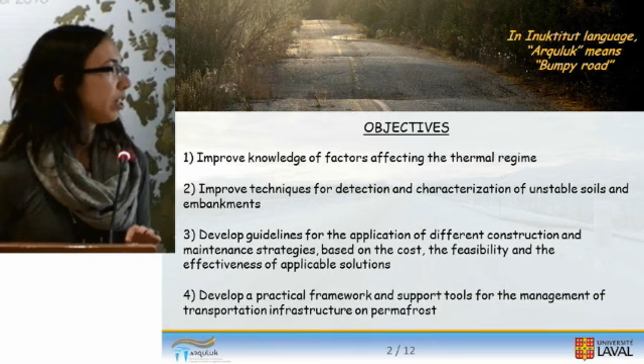And also within the ARQULUK program, we want to develop guidelines for the application of different construction and maintenance strategies based on the cost, the feasibility, and the effectiveness of applicable solutions. And finally, we would like to develop a practical framework and engineering tools to support the design and the management of transportation infrastructures on permafrost.

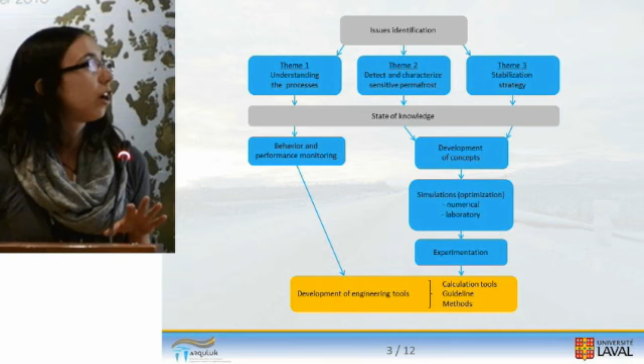The program has been divided in 3 different themes, which are understanding the processes, detect and characterize sensitive permafrost, and stabilization strategy. These themes are divided in a way that will help the involvement of graduate students through master's and PhD projects. And all of these projects will start with the state of knowledge and end with the development of engineering tools, such as calculation tools, guidelines, and methods.

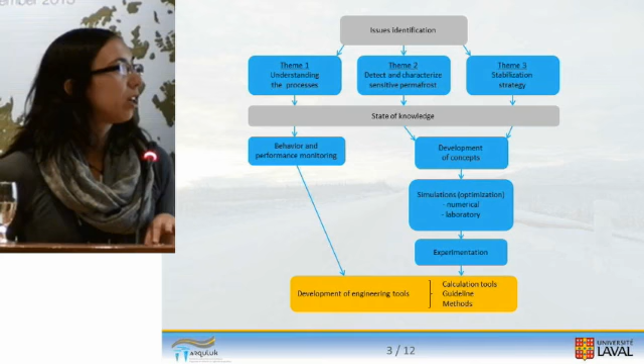But to do so, there's two different paths that we can follow depending on the theme that we are in. So all the projects in Theme 1 will be characterized by behavior and performance monitoring, and all the projects in Themes 2 and 3 will follow the path that is characterized by the development of concepts, laboratory and numerical simulation, as well as experimentation. The ARQULUK program started in April 2012, and it will be an ongoing 5-year program that will end in 2017.

So I'm going to talk more about all the projects a little bit later in my presentation, but this is the timetable. I just want to show you the progression of all the projects so far. So the red line represents where we are right now. So in Theme 1, which is the improvement of knowledge, we have one master project on experimental test site monitoring that will be in Beaver Creek and Tasiujaq, and it will start in January 2014. We have an ongoing PhD project that just started.

In Theme 2, which is the identification and characterization of permafrost, we have an ongoing project on geophysical and thermal methods. There's a master project that will also start at the beginning of the summer about profile analysis. We have an ongoing master project on oedometric testing. And we have now a new project about the mechanical behavior of marginally frozen soils, so we're still looking for students for this project. And in Theme 3, which is about the development of adaptation techniques, there's an ongoing master project, and there will be a PhD that will start this winter about guidelines and strategies of risk management.

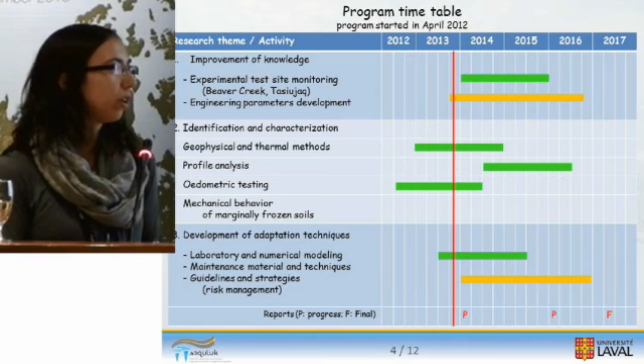So I'll talk about most of the projects that are in this table, but I would like to let you know that we have now other projects that are associated with the ARQULUK program, but that are mainly funded by Transport Canada or Transport Quebec, for example. So they have been associated to the ARQULUK program, and I will be talking also about these projects.

So the first project I'm going to talk about is the development of a design procedure for low-impact drainage systems, which is actually my PhD project. This project is also financed by ADAPT, which is a program on Arctic development and adaptation to permafrost in transition, also financed by NSERC. A lot of people have been talking about the big problem of water ponding along our infrastructures in the north. So with this project, we want to find solutions. So what should we do with the water flowing through our roads or ponding along our embankments, which is the main point of my project.

And this will involve soil temperatures as a function of water flow. So we want to find a relation between the water flow and the heat directly transferred to permafrost. This project also involves thermal modeling and laboratory testing, and the development of criteria for allowable convective heat transfer. So what is the maximum heat flow that we can accept, for example, in a culvert before permafrost starts degrading.

This project will also involve the development of mechanistic indices, such as a water flow heat index, as well as a transfer function to convert water flow to heat transfer potential. And finally, it will involve development of a practical engineering method for low impact drainage systems.

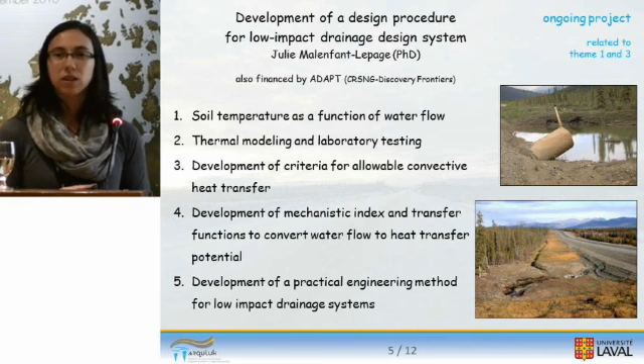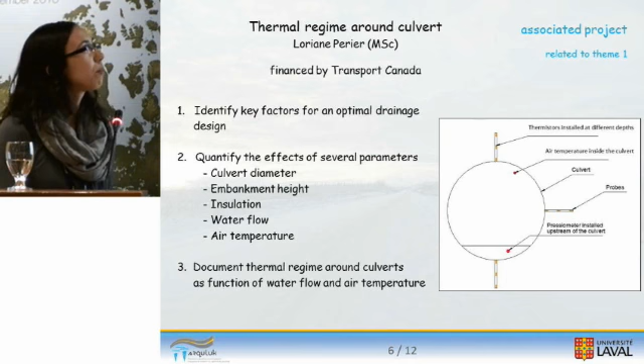So this is an associated project to the ARQULUK program that I was talking about. This project is financed by Transport Canada. It's about the thermal regime around culverts. So the main goal is to identify key factors for an optimal drainage system.

So what we did this summer, we instrumented 2 culverts in the Yukon, one which is at the Beaver Creek experimental test site, and another one very close to the Alaskan border, between Beaver Creek and the border, in fact. So we had thermistor cables at the top, on the side, and at the bottom of those culverts. We had air temperature sensors inside them, and we also had a pressurometer installed upstream of the culvert.

The first culvert that we instrumented was at the Beaver Creek test site, so it's a culvert that was already in place, so we had to get in the culvert, drill in a really small place, try to stop the water flowing through. So it's been a really great experience, and much more complicated than what we thought. The second culvert that we decided to instrument was during the reconstruction of the Alaska Highway, so they were changing one of the culverts, so it was much easier to add all the thermistor cables.

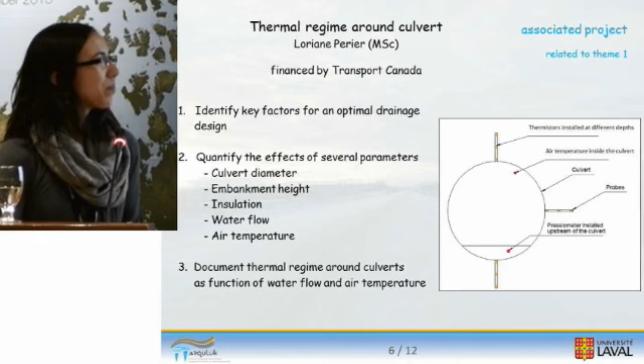And this will help us to quantify the effect of several parameters, such as culvert diameter, what diameter we should use most of the time for our infrastructures. The embankment height, should we use insulation or not? If yes, what will be the proper design for insulation on the culverts? We'll get more information about water flow and air temperature as well.

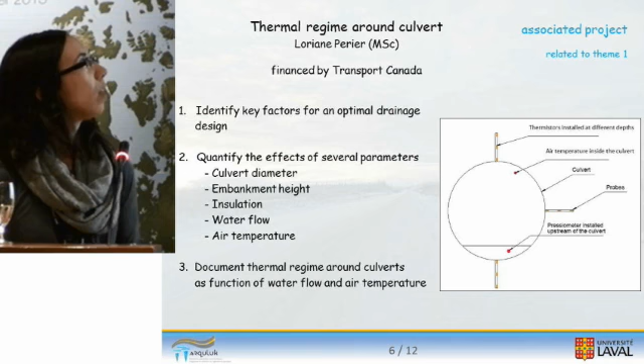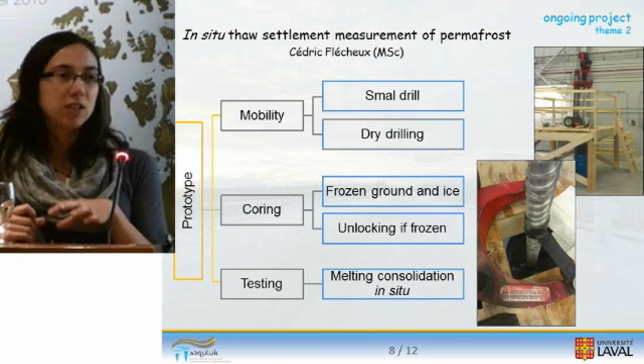So this testing prototype will allow the thawing of permafrost inside the oedometric core barrel. So then we'll be able to measure directly on site the consolidation properties of permafrost under different vertical stresses. So here you can see some pictures of the prototype that we have in Quebec City, but unfortunately I cannot talk more about this because we're waiting for a patent, so I cannot give more information about this prototype.

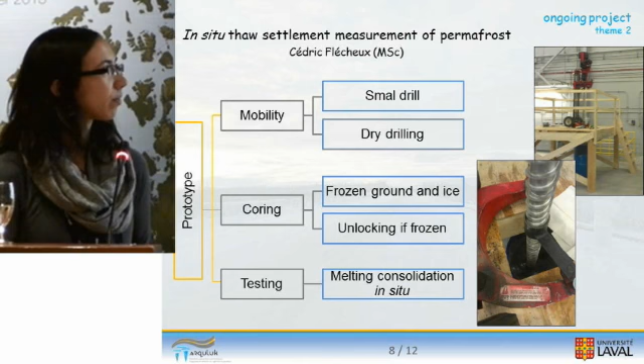So this research will approach the problem from a material specification point of view instead of only considering the color of the surface. So at the Beaver Creek test site, there are 4 sections tested. In the back here, we have bituminous surface treatment sections that use light color aggregate. And here we're testing cold patch, a material that is usually used in the north for maintenance, patching the holes. And here we have a product developed by Lafrentz and a product developed by Nippo, which is a Japanese company. These 2 products are mainly a kind of marking paint that they add particles in to give good textures.

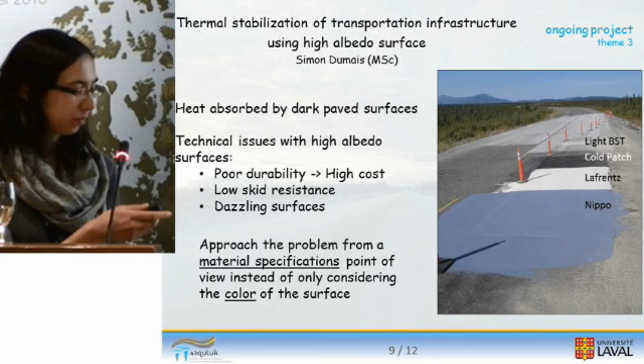So here are the first results that Simon obtained for this site. In black, we have the cold patch section. In gray, the light BST, in blue, the Nippo product, and in white, the Lafrentz product. And here you have the albedo values that Simon measured in the field. And here he is comparing the temperature measured at the surface, so just below the bituminous surface treatment surface.

And we can observe that there is quite a big difference in the temperatures measured during the summer period in 2012, and there is even a difference of 7 degrees Celsius between the cold patch and the product developed by Lafrentz. However, during the winter, there is almost no difference between all the sections, because I think one of the main reasons is the Alaska Highway is covered by ice and snow most of the time during the winter, so we don't see any difference in the temperatures.

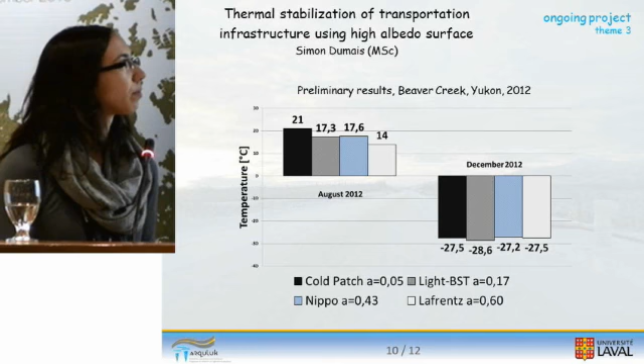And this project is about the monitoring of thermal and mechanical behavior of the access road to Salluit Airport in Nunavik. This is an associated project also to the ARQULUK program, and it's financed by Transport Quebec. The access road in Salluit was completely reconstructed in 2012, and to thermally stabilize the road, they added a thermal drain, which is a geomembrane that has been developed at Laval University. The heat drain allows the air circulation directly at the bottom of the embankment. So mainly during the winter, the heat will be conducted directly to the drain, it will travel up by convection, and the heat will be expelled out by the chimneys included in the drain.

And I would like to let you know that this project is also done in collaboration with the team of Michel Allard in Quebec. To monitor the thermal regime at the test site, more than 100 thermistors were added on vertical cables. And there are also 2 series of optic fiber that were placed horizontally in the road to measure the temperature, which is new; we never used that technology before. And to monitor the mechanical properties of the road, vertical and horizontal inclinometers have been placed along the access road.

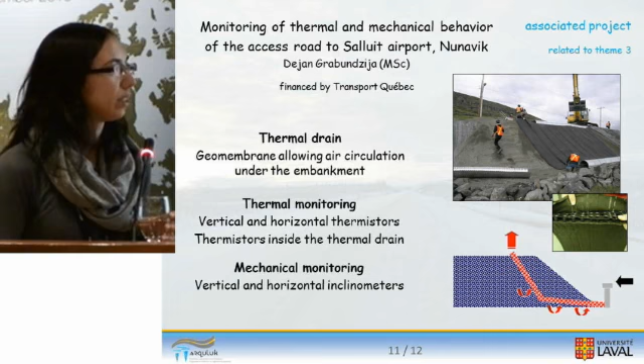So to conclude, the ARQULUK program will generate expertise and know-how that all the communities in the north will be able to use, as well as the companies working in the north. And I would like to thank all our partners and collaborators of the ARQULUK program.

And I would like to let you know also that there will be a course given at the Yukon College, the advanced course on permafrost engineering applied to transportation infrastructures. This course is given by Guy Doré and also by Chris Byrne. It's the 4th year that the course is given, and it's always in May. It's a 6-day course, and it includes 2 days in the field. So there will be a field trip along the Alaska Highway where we see different sites where permafrost degradation has been observed. So if you have any question about the course, feel free to ask me or to contact directly Guy or Stephen Mooney at the Yukon Research Center.